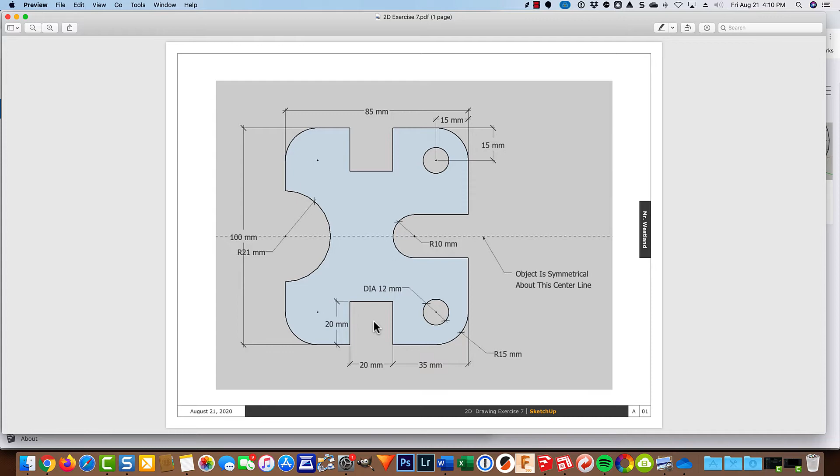So I'm just going to jump into SketchUp here. I'm going to create a new metric drawing, and then I'm going to insert that JPEG image from my computer. There it is right there, 2.7 JPEG. So I'll insert it as an image, and I'm just going to stick it on the ground.

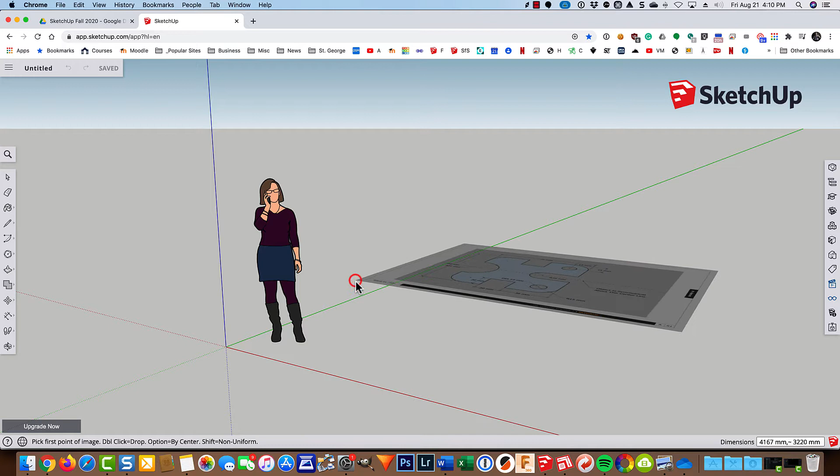I forgot to go to the top view, but that's okay, we can do that now. So we'll go to the top view here. I'll hit my space bar and circle that lady and delete her.

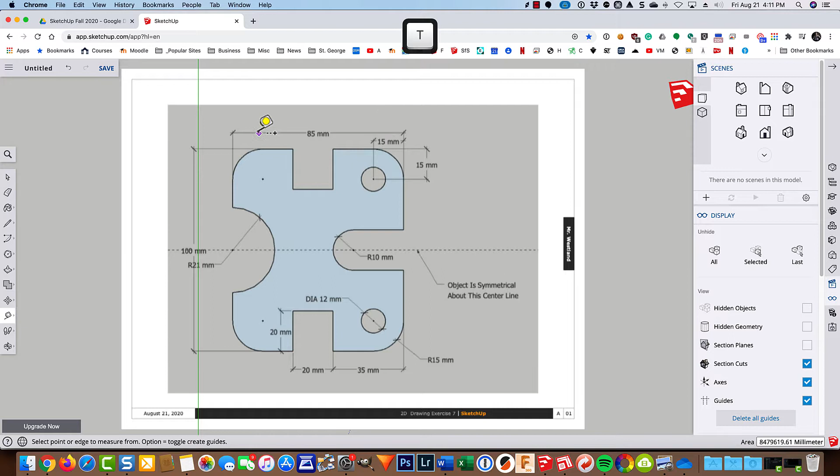And then I need to resize this. So this part right here is 85 millimeters. I'm going to take my tape measure tool and just click from about there to there, and right now it's over 1,000 millimeters. So I just type in 85, hit enter.

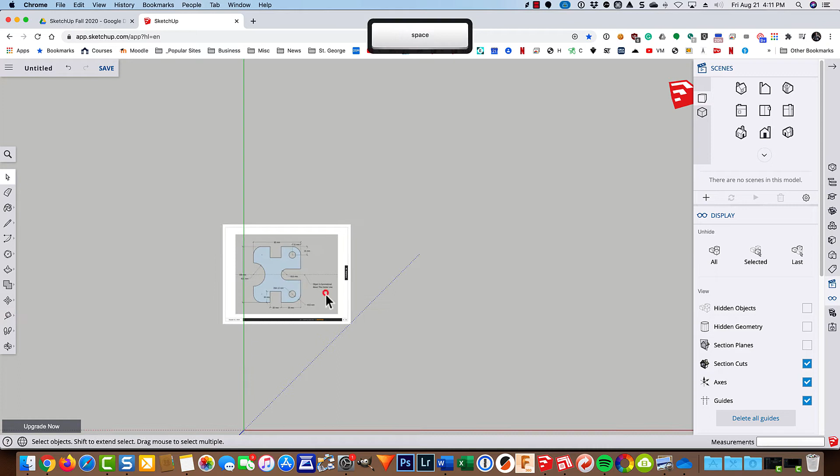It asks me if I want to resize the model, and that's why I did it. I mean, what a stupid question, right? So we'll come into here, I'll select it, type M for move, and just drag it right over there. So let's get started here.

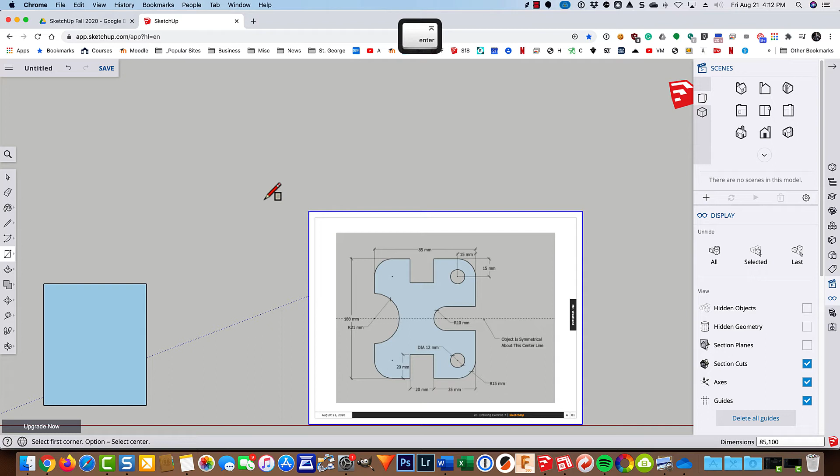I'm going to need a rectangle 85 by 100. So type R for rectangle, and I'll zoom out just a little bit here. Click and type in 85, 100. And oops, nope, that's going the right way.

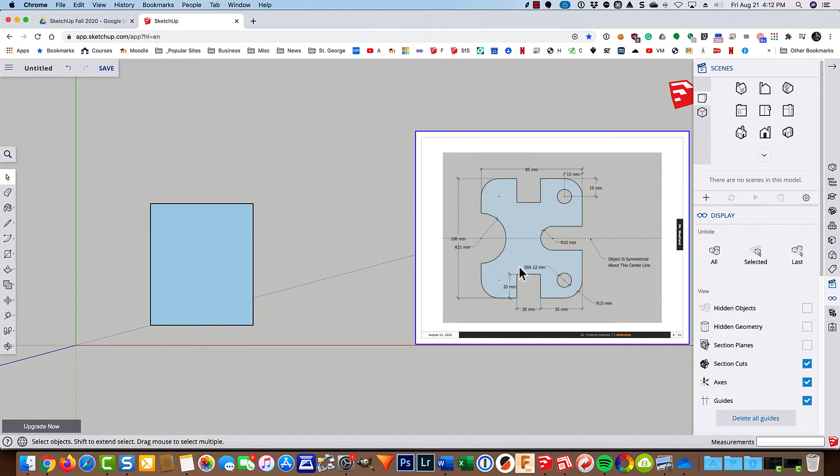Now if it was going the wrong way, I could type in, without clicking on anything, retype the numbers but reverse the order and make it 100, 85, or I could just delete it and put it in again. So type my space bar to get back to my arrow or select tool. Click on this, type M to move, click anywhere, and I'll just kind of snug it over like that so I can see what I'm doing.

And then press Shift Z to do zoom extents. Hide that, and now let's put in some geometry.

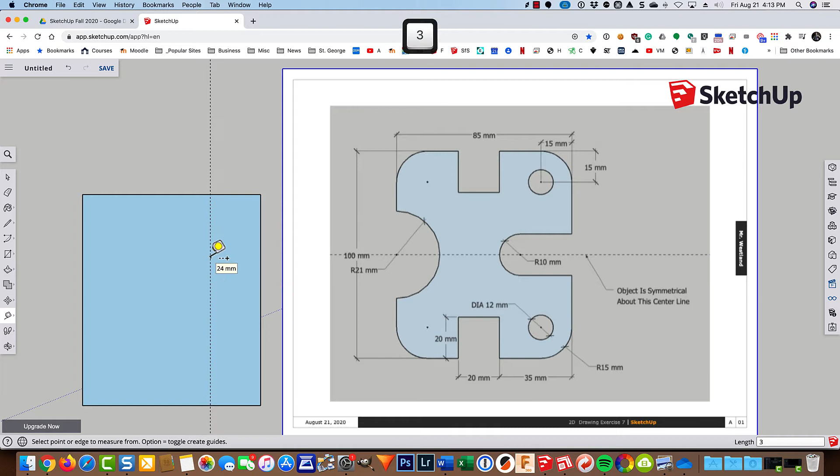So let's focus on this little box right here, which is over 35 millimeters, and they are 20 by 20. So T for tape measure. I'll pull over here, type in 35, hit enter, and then I'll click on this again and pull over and type in 20 and hit enter, and then I'll grab this line right here and type in 20 and hit enter. Using my line tool by pressing L, looks like a pencil but it draws straight lines, I'll click right here, E for erase, and boom, we've got the first part done.

Now let's work on this hole right here. This hole is centered 15 by 15, so let's go ahead, I think I can delete these guidelines right now. I'll go ahead and erase them.

So T for tape measure, I'll pull over, but I accidentally left clicked and it came in at 81 millimeters, but that's okay. So I'm just going to type in 15 and hit enter. See how friendly SketchUp is? I'm going to pull down here, and SketchUp reads my mind and says, oh yeah, you probably want to go 15 again. So I'll go ahead and do that.

Now these circles right here, if we look down here, they have a diameter of 12, which is a radius of 6. So C for circle, I'll pull out and just type in 6 and hit enter.

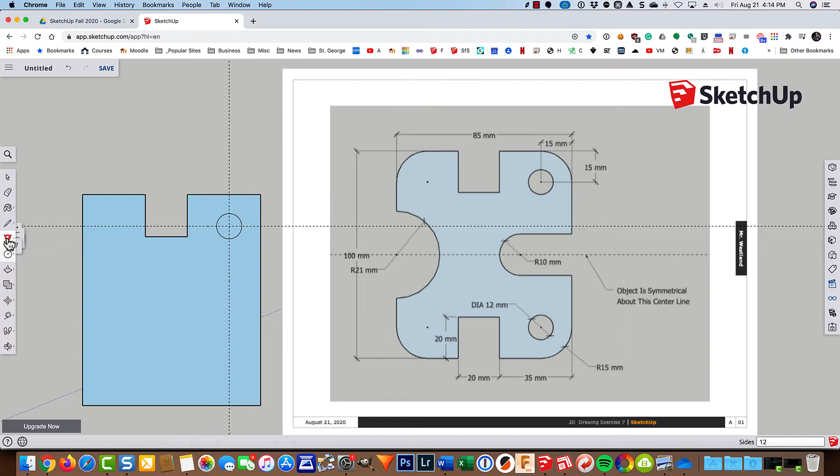Now I need to make an arc up here, the radius of which is 15 millimeters. So I'll click on my arc tool, and we've got several to choose from, so you're going to want this top one. I click here, come up to here, sweep down until I get to that intersection. It tells me I have a quarter circle, and I click, tap on my space bar, and I'll select that line segment and delete it, and select that and delete it as well.

Now you can use the erase tool, I mean that would be fine as well. While I'm at it, I'm going to select that circle and hit delete.

Now I need this line right here, which represents the top half and the bottom half. This piece right here is 100 millimeters wide, so that means I need to come down 50. However, there's an easier way to do that. So I'll type in T for tape measure, maybe just click up about on that edge, and I could pull down and type in 50, or I can just mouse over here to the midpoint. So that's what I'm going to go ahead and do.

So now I forgot to draw this arc right here, although it could be done at any time. I've got this line right here, which is down from the top 15 millimeters. So I'll type in T for tape measure, click on a point here, pull across, type in 15, hit enter, and then click on the same arc tool, click right there, come up 15, sweep down, click on that intersection, E for erase, and we're starting to look pretty good here.

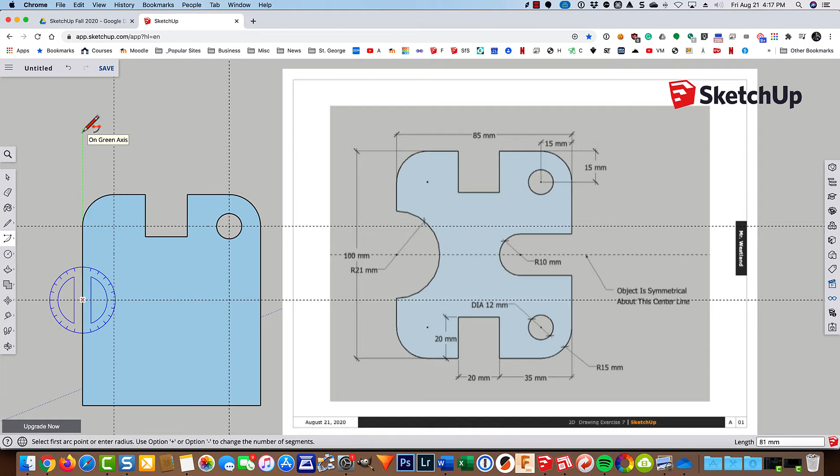So at this point I need to make an arc here to notch this out, with a radius of 21 millimeters. So again, I'm going to click on my arc tool. Here's my center right here. I'm going to pull up along the green axis and type in 21 and hit enter. And then without clicking, I'm just going to mouse down like this, and then use my erase tool to erase that line.

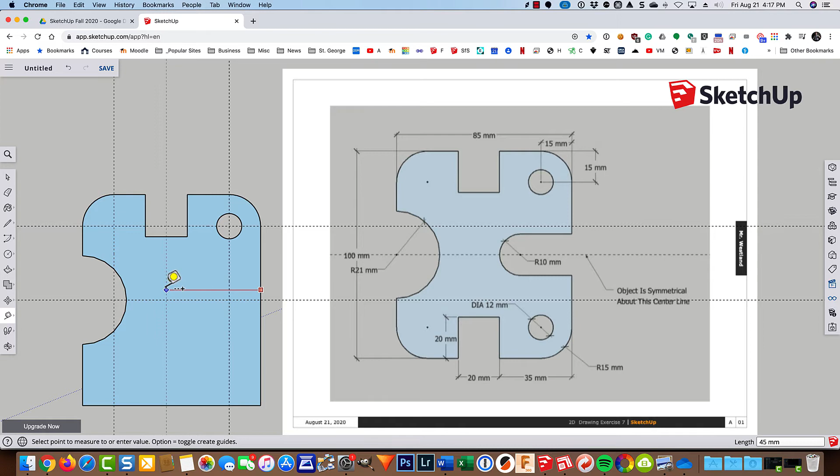So what else do we need to do? Well, we've got this circle right here, and I'm saying to myself right now as I'm looking at this, you know what, I goofed up this drawing, so I will update it for you. But this radius right here is 25 millimeters from this edge right here. So I will have a corrected drawing for you, but I'm just going to go ahead and type in T for tape measure and pull across here. It doesn't matter how much, because when I let go of the left mouse button, I can just type in 25 and hit enter.

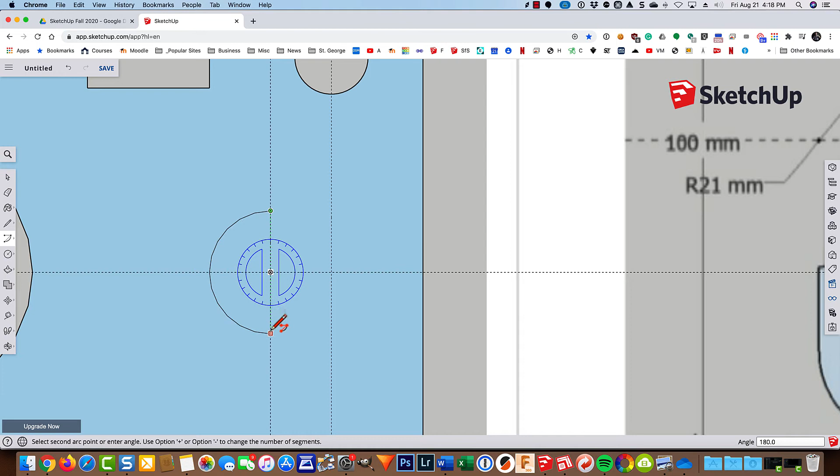And then I'm going to zoom in here so you can see a little bit better. Click on my arc tool. The radius is 10, so click, I'm going to pull up, type in 10, hit enter, and then sweep down around like this and click. Then all I need to do is type in L for the line tool and go from this endpoint across to this edge, hit escape, start a new line that goes across here like this, hit escape, and then E for erase, and there's that part right there.

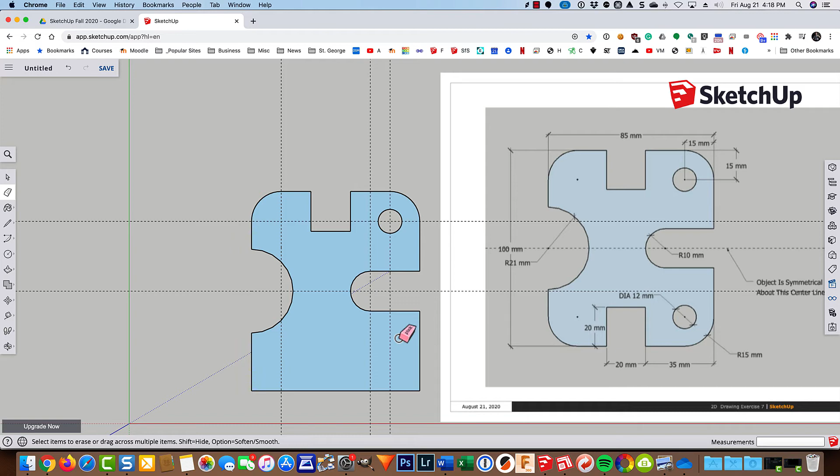So again, this center point right here is 25 millimeters from this vertical edge line right here. So if you want to, you can just go ahead and follow what I did on the top down on the bottom, but here's what we're going to do to cheat and at the same time learn something new.

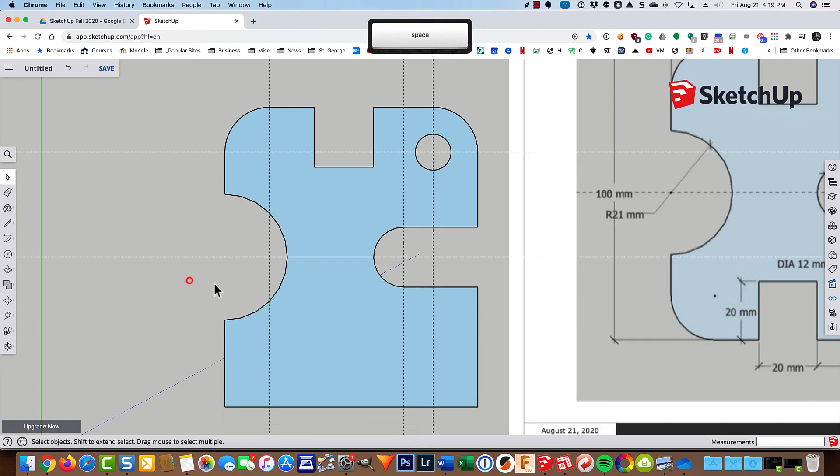So I'm going to go ahead, hit my space bar. When I select this, I've got an entire face, so I'm going to go ahead and type in L for line and draw across like that, and you'll see that I've got a bottom face and a top face. So I'm going to take this right here, and I'm going to draw a selection box like this, right to left, to select all that geometry, and I'm going to delete it.

Then I'm going to draw a selection rectangle here to select that geometry, or I'll just go ahead and click outside. I can just double click and it'll select all of that. Type in M for move.

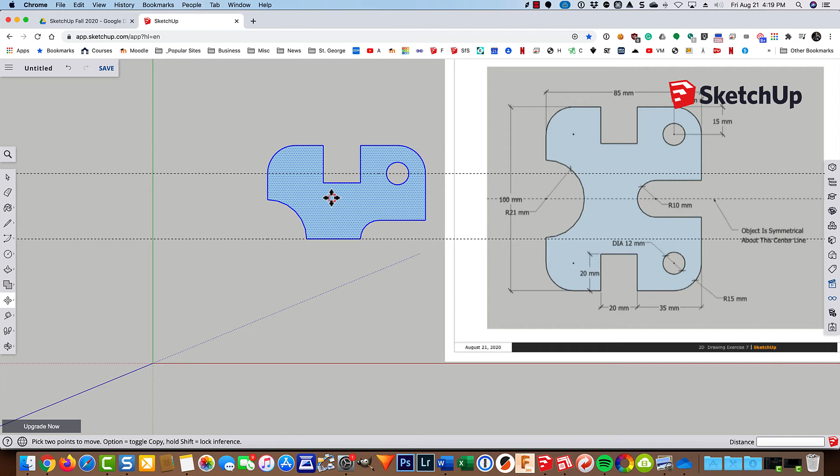Now that it's selected, click, and then type in my option key to make a copy. I'm just going to pull down like this and put it down here somewhere. Now here's where the magic happens.

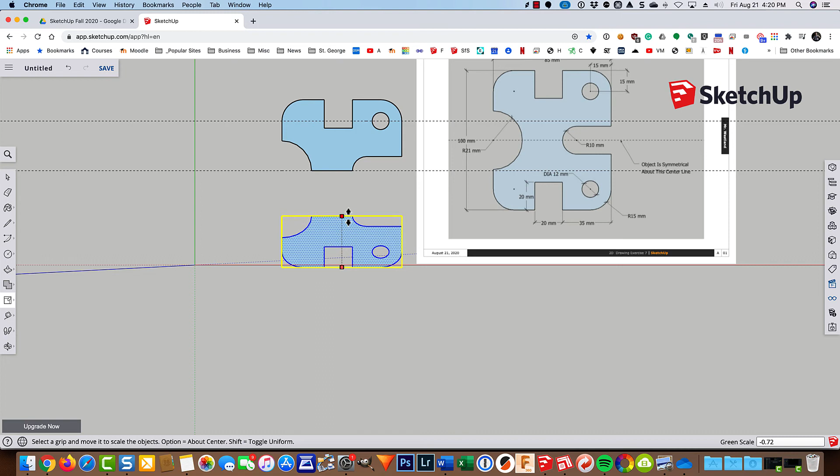Obviously this is not a symmetrical reflection of what's above. But if I type in S for scale, I get these cool green grips, and there's lots of ways I can scale it, but I just want to grab this bottom grip and pull up like this, and let go. Whenever you want to mirror something, the number you type in is -1.

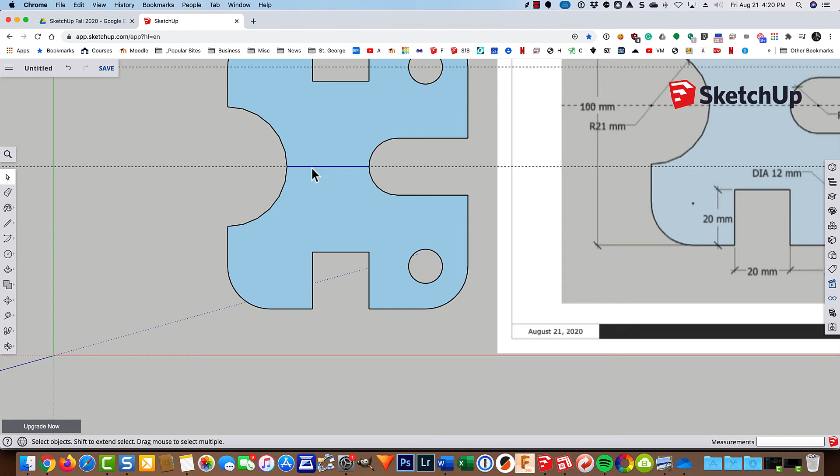Just like that. So now I can type M for move. Everything's still selected. Click here, come up to here, select outside. I'm going to select this line segment right here. There we go. And I'm going to delete it. And my drawing is done.

So now let's go ahead and add some dimensions. I'm just going to take this for right now and hide it because I don't need it anymore. Shift Z gives me a zoom extents. And I'm going to come into my dimension tool.

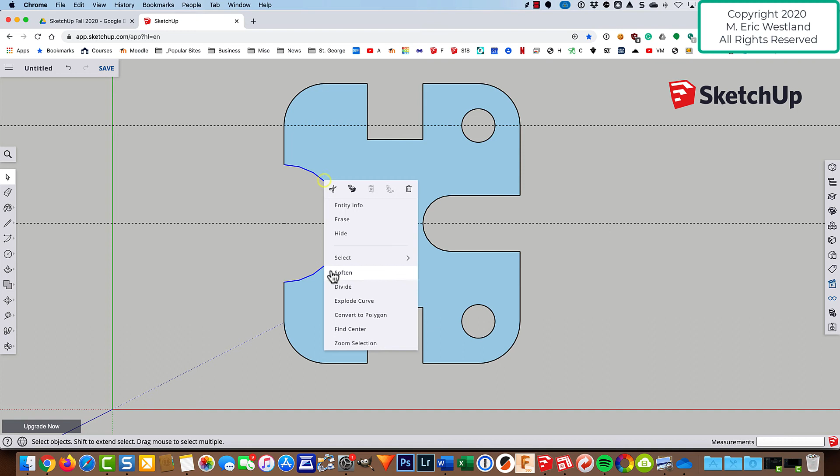Let's see, I need to zoom out just a little bit. Actually, before I do that, I'm going to use my select tool to come up with my center marks. So there's the center. There's the center. And I could click on this circle here, it has the same center as that outside arc. Click on this one. And finally the last one is this one right here. And so that's looking pretty good.

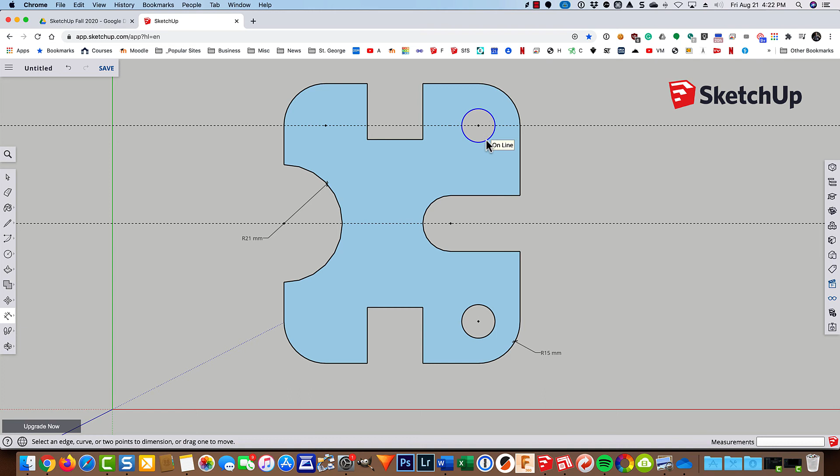So let's just go ahead and now start to add some dimensions. I'll click on this arc and pull out here, so that has a radius of 21, which is correct. And then I'll grab this arc here, which has a radius of 15. And I'll grab this circle right up here, which has a diameter of 12. And then this arc right here, which has a radius of 10.

In other words, this line segment up here and this line segment down here are 20 millimeters apart, but I do not need to add that dimension because this radius of 10 tells me that from this part of the half circle to this part of the half circle has a radius of 10, or a diameter of 20. So that would be redundant, just extra information that we don't need.

And click on this line right here and pull up and say that that's 20, and then I can go from this point, say down to this point, and pull up, and that's 35. And let's see, oh, I need to specify that depth right there, so I'll click right there and pull out and say that that's 20.

And so I've got my two circles, I've got this notch right here. Oh yeah, that 25 millimeters, right? So I need to click here and click here, and there we go. We'll pull up and say that that's 25 millimeters.

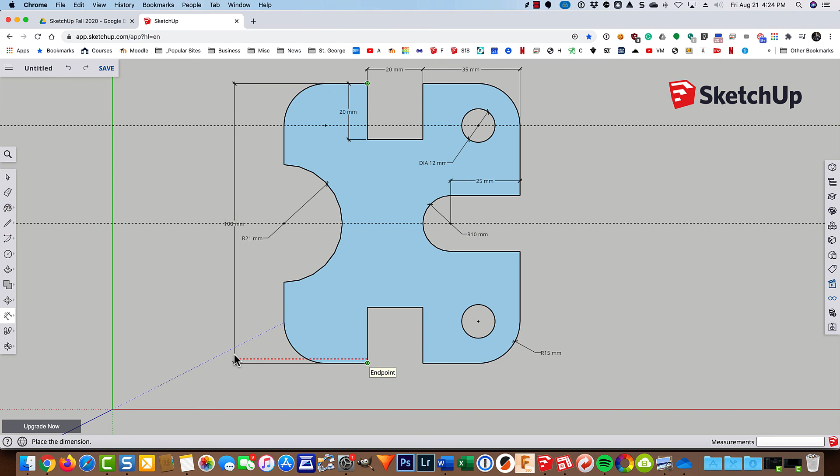So I'll go ahead and go from here down to here and pull out and say that that's 100 millimeters. And then I can say, from this point to that point there should be 85 millimeters.

And then I think the last thing we need to do is add that annotation or note about how the top half is symmetrical with the bottom half. So we'll come into our dimension tool, and we've got this tool here called the text tool. Our cursor's looking for a spot to attach the leader to, so I'll click right there, and then it asks us to enter the text. I'll type that in, and to finish it off I'll click outside. So you may notice that there's an arrowhead right here.

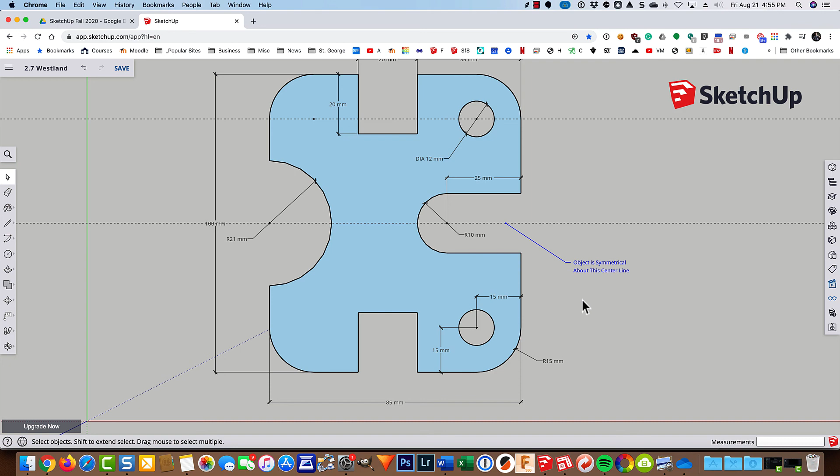If you want to change that, you can right click and choose to make it a dot. But the important thing is that you have that information there, and using the text tool is how you go ahead and do that.